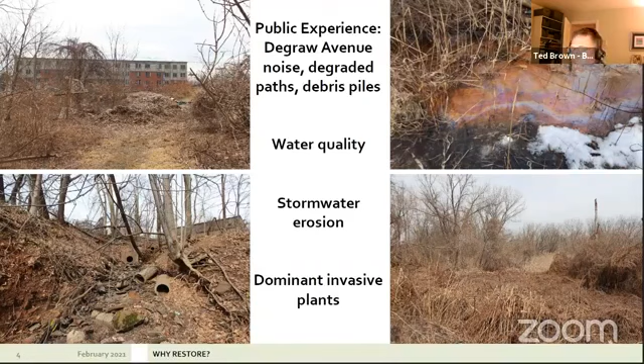And with the plan and with the history of thinking about how to address that, we believe we've come up with an approach that will address this range of conditions. And the overall project had a number of goals. They were ecologically based, but also community based, because when the community interfaces and integrates with site ecology and becomes stewards of the landscape, like the history here at Teaneck, that's when we see the most successful project outcomes. So we wanted, and when I say we, I mean our collective team, the county, all the partners.

We want to enhance the site's natural resources, increase the biodiversity, manage the stormwater flows across the site, and treat that water as it's transferred across the site, filter it, infiltrate it, and beneficially use it.

Of course, we want to enhance and improve upon the public access. That's a major selling point of the site, and that's something we're going to enhance and capitalize on so that we encourage more people in the community to visit the site. And with that comes health and well-being, which is particularly important in our era of COVID, where we need to be thinking about mental health, exercise, contemplative spaces, and being able to release pent-up energies and perhaps even frustrations.

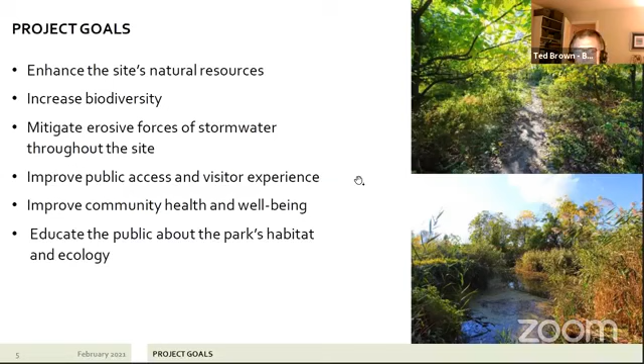And then when you're on site and you hear the term regenerative stormwater conveyance, you'll look at a particular feature and you'll say, I know what that is. I learned that at such and such a presentation.

So the restoration that's going to occur is really quite spectacular. It's about a 43-acre overall site. We're going to be targeting 20 acres of that site for explicit habitat restoration, which I'll talk about a bit later on. That'll include about 430 feet of stormwater channel that'll be restored.

Those are incised or eroded gullies that are actually dangerous and pollutant sources. We're going to heal those and regenerate those so that they can become headwater streams to the Teaneck Creek further downstream. We're going to improve about 300 linear feet of trail, with a little bit of realignment involved.

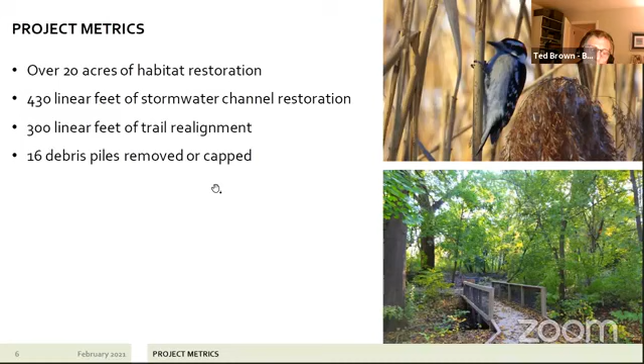And then of course, we're going to address the debris piles that are on site and move them to a single location at the southern portion of the site and cap that debris.

This is the runoff coming off of Teaneck Road and discharged in an uncontrolled manner, where it's incised this gully. We're going to heal that, repair that with a practice called regenerative stormwater conveyance, which you can think of as a step pool type of system. I'll talk a bit more specifically about that again in a moment.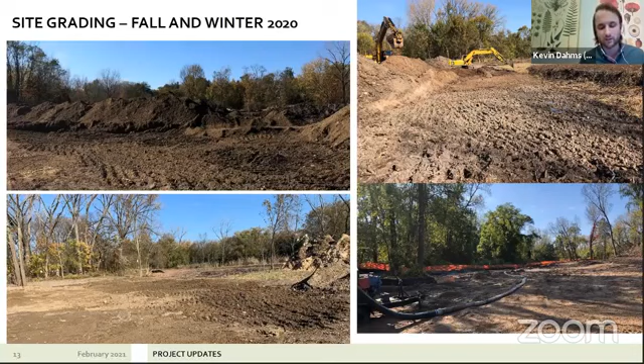So you're going to be able to get that ponding, those pools, creating the wetland habitat we're looking for. These are photos of the contractor getting down to subgrade before we install the sand wood chip mix, where the plants will grow.

These are photos of that lower sand seepage area in the southeastern portion of the site, after they've taken off the existing surface, brought it down to subgrade, and installed one foot of sand wood chip mix to the proposed elevation, creating those sand seepage berms that Ted showed in the diagram.

You can see in the top left corner one of the weir structures that Ted mentioned, a stone weir that's going to hold the water. During storm flows, the water will flow over that, and you can see it being ponded here in the pool.

The design includes hummocks in the middle of the pool to create microtopography, as well as some wood material. In that photo you can see a root wad, like upturned roots of a tree, a natural feature. These all promote microtopography and microhabitats within the wetland pools.

There are tens of these pools throughout the site, and they'll all have these sort of minor features. The photo in the bottom right is the outflow of the system, in the southeasternmost portion of the sand seepage wetlands—the last weir structure the water will go out of before flowing down the slope into Teaneck Creek.

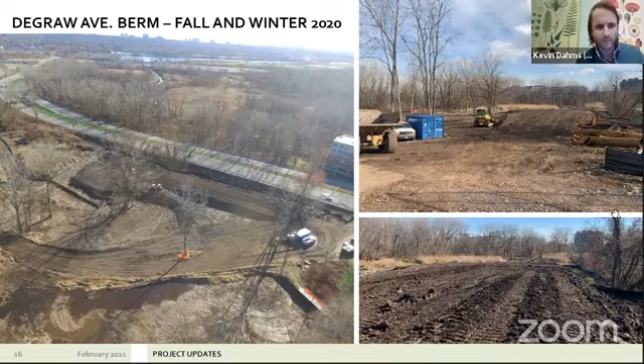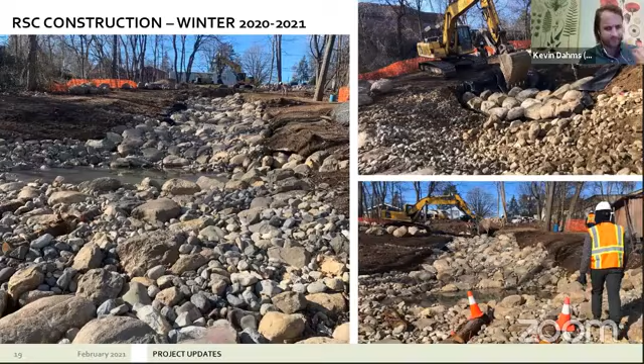I did have a question come in about whether there will be any changes to the pond, Dragonfly Pond. There aren't any changes directly to the pond. Maybe, Ted, if you go back to the overall site plan. So we're not touching Dragonfly Pond.

But it is factoring into how we're adjusting the hydrology on the site. There are going to be some flow path structures—meaning weirs—leading to and from Dragonfly Pond. So the water going into and leaving Dragonfly Pond will be incorporated into this system, but there's no work being done within the pond itself.

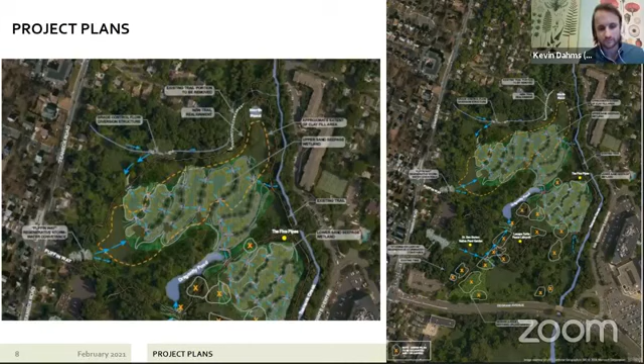Our next question was directed to Ted: what's the purpose of removing the clay from the area where the sand seepage wetlands are being installed? The clay is natural as well, although it might have been imported as part of the legacy landfill construction. But the clay is a very impermeable boundary, so it prevents water transmission both vertically and laterally.

In terms of wanting to create a wetland system here, we wanted to try to get beneath that clay layer so we could have a connection to the groundwater system. The Phragmites were present on that clay cap as well, and so we were targeting the Phragmites—we needed to remove a certain depth of clay to also remove the Phragmites.

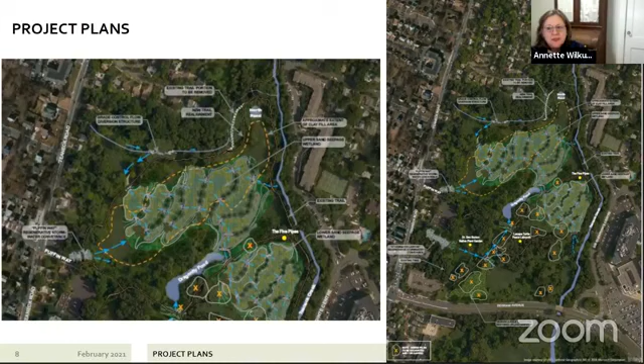So speaking of Phragmites, we had a bunch of questions come in about that. I think maybe this should go to either Garrett or Annette. What is the difficulty of removing the Phragmites, being there day to day if you're seeing that firsthand? And why don't we want Phragmites, and what will we maybe be putting in place of it? Garrett, since he's there on a daily basis making sure the contractor is doing everything the design has, he has a really intuitive view of how this is being constructed. Garrett, do you want to take it?

Sure. The significance of removing the Phragmites is that it's an invasive plant, one of the most aggressive and hardy plants we've ever encountered. Being able to ensure that we've removed a significant amount of its root mass as part of the project is critical for the project's success, in allowing new native species to be planted and ensuring any possible resprouts of Phragmites can be handled in a mechanically efficient way. That has basically manifested in making sure the contractor is handling any earthwork material that could possibly be infested with Phragmites roots in an ecologically responsible way.

If I can add on to that, Kevin mentioned this, but Phragmites are a particularly aggressive invasive species, and when they take over an area, it becomes what we call a monoculture. When you have a monoculture, you have low biodiversity. One of the major goals of most restoration approaches is to increase the biodiversity, the complexity on sites, because that complexity allows the sites to be more resilient in the face of some sort of disease or perturbation that comes through. Take for example elm trees — Dutch elm disease can wipe out a whole slew of street trees, because there's not enough biodiversity in those street trees. If you have an acute event like that, you lose all of those features. So the goal of the restoration is to provide biodiversity, more complexity, that allows the system to be more resilient.

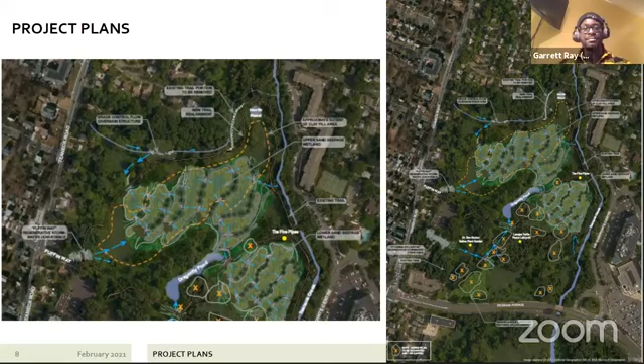Yes, the plants planted will be primarily native, and I would have to ask Adam if we would allow volunteer donations. I'm sure we could accommodate. Absolutely, volunteers are very important for us, but one of the cautionary items I've learned from the project team members is that the plants selected for the restoration work are very specific, and they need a sense of quality and sourcing, knowing they're going to be in the best shape and able to be planted and thrive.

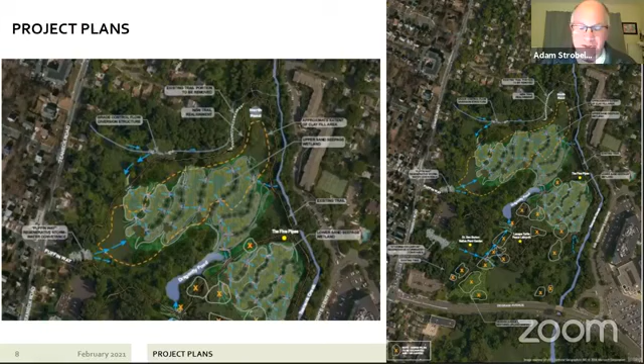So for folks who would like to volunteer with plants they'd like to donate, I think we could probably accommodate that at other locations outside of the restoration area. Obviously, not the entire site is part of the restoration project — our northernmost portion of the park at Fike Lane is an area that can accommodate new types of trees. Alexa, Allie, and a number of volunteers have for the past several months been working very hard doing a lot of plantings in that particular area. So we can talk to Alexa and figure out how to accommodate your ideas — it's a great question. We definitely can do some plantings at Fike. In that area, we just did 200 new native tree species plants.

That's exciting. Our next question jumps back to Stormwater Canyon. The first question in this realm is: what is the source of the stormwater running into the site, and how much debris will actually be caught? We have a lot of issue with garbage running off the road and things like that in the new stormwater conveyance systems.

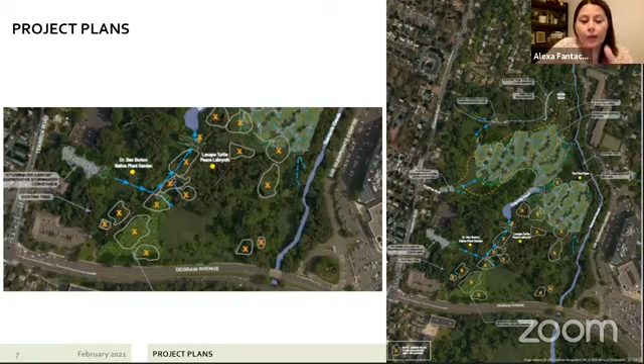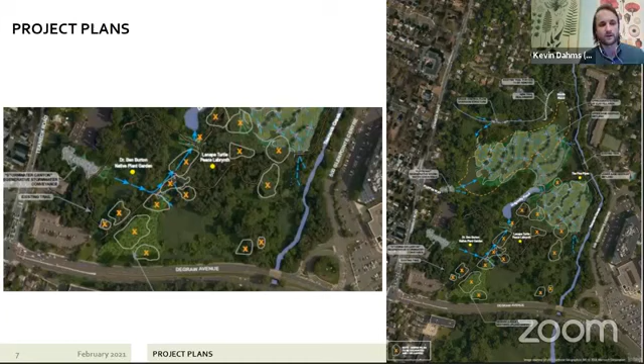The source of that stormwater is the residential area just west of Teaneck Road. It's a fairly large drainage area, and all those storm sewer pipes come and discharge at this outfall. In terms of debris collected there, there's a concrete inlet structure, kind of rectangular and pretty tall, where the pipe comes in, and that would potentially collect any leaf debris before it comes out. There could be other flows that contribute debris to the RSC, but there's a concrete structure that the pipe goes into before it bubbles up and overflows into the RSC.

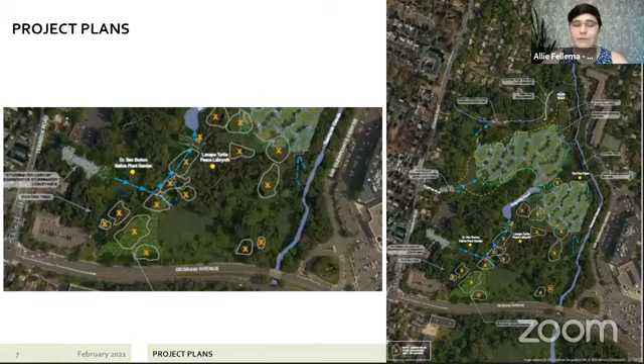Our next question is for Kevin. It says that in the site grading photos shown, the winter and fall 2020 photos, the site appears very wet. They were wondering, since the purpose of the restoration is to prevent flooding, why is there so much water pooling on site?

That's a good question, and there's a couple of reasons. First off, these pools are designed to be wet, so they're designed to hold water and slow it down, like Ted said. The water will pond in these pools, then slowly seep through the sand seepage berms into that sand wood chip mix. So this is what they will look like for a large part of the time. They're designed to pool like that.

Also, particularly in these photos, they're filled with water because the upper sand seepage area, to the northern part of the site, is not constructed yet. So there's all this runoff falling on that part of the site and basically being collected in these pools here. You're going to have a more distributed pool system at the end of the project, with sand seepage pools and berms on the northern part of the site as well. So a couple of factors here, but this is how they're designed to function: to hold water and then slowly release it.

In terms of flood prevention, it's preventing flooding elsewhere in the area. Along Teaneck Creek, all of this runoff would have been more flashy, getting to Teaneck Creek much more quickly, causing water levels to rise and flooding elsewhere around the site. So the idea is to hold the water within Teaneck Park and prevent flooding elsewhere.

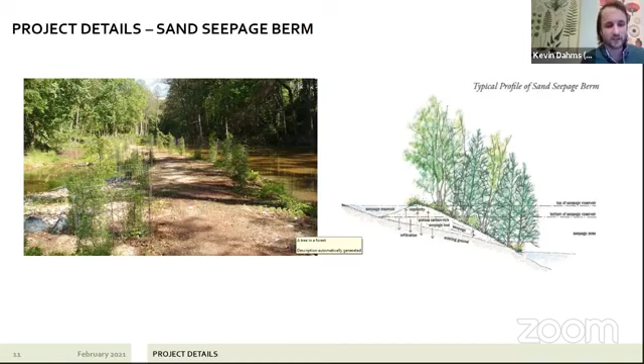So if you go to the slide with the final grading of those berms, they're actually not very deep at all. They're going to be 6 inches to a foot deep at most in a lot of areas. So it's really shallow ponding there, but they're large, so over a large area they're able to hold that much water on an areal basis.

And then the long-term maintenance - these are natural systems, so they're really designed to be low maintenance. I think the biggest maintenance will be invasive species control, making sure the native species are thriving and well established so they can be dominant and take up the nutrients and sunlight. That's probably going to be the biggest maintenance, but overall they mimic natural systems that don't require routine maintenance like hard infrastructure.

Ted, I don't know if you have anything else to add based on the ones we've installed elsewhere. I think the only other addition is the stormwater infrastructure coming into the site. There are some hard infrastructure elements, like a catch basin at the street interface, that from time to time may require some maintenance and inspection.

This actually - go ahead, Allie. I was going to say this segues very well into the next question. Someone asked, will this provide benefits to the city as well, such as preventing flooding by containing stormwater?

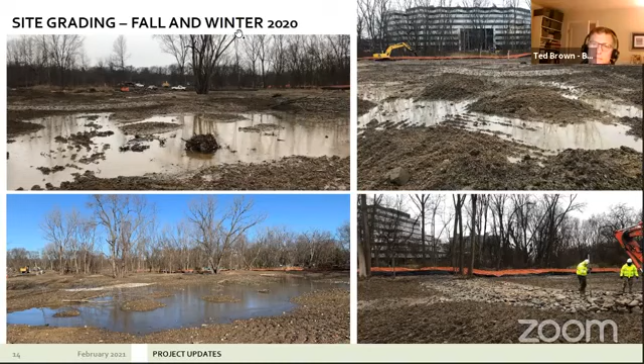Stay warm, enjoy the snow. Happy snow day, everybody. Thanks, everyone. Thank you.